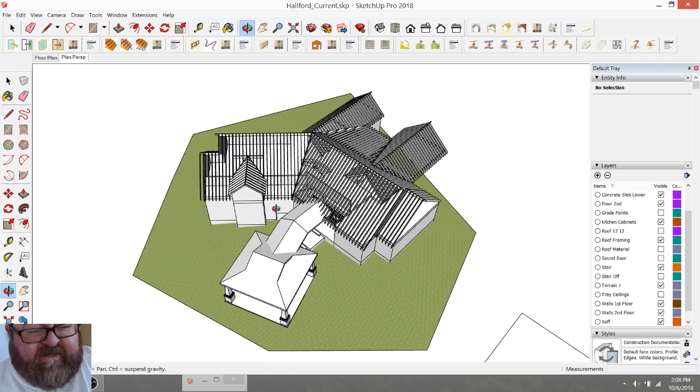Okay, so I've got an update. This roof framing has turned out to be quite the task, as it always is. Yesterday I was working on this little low slope filler piece here, and I also did this dormer roof here, the framing for it.

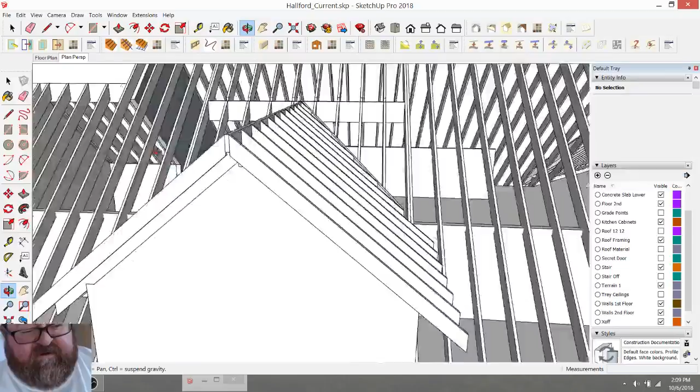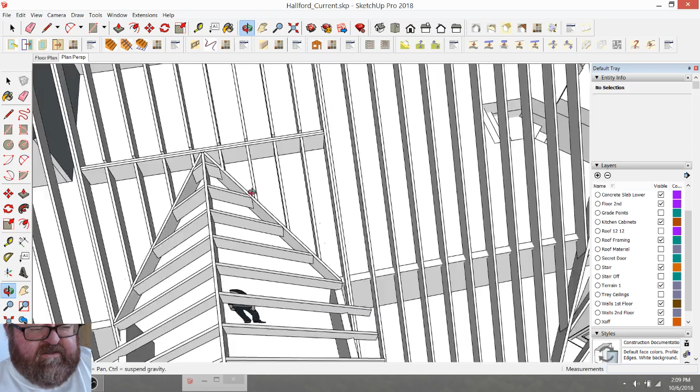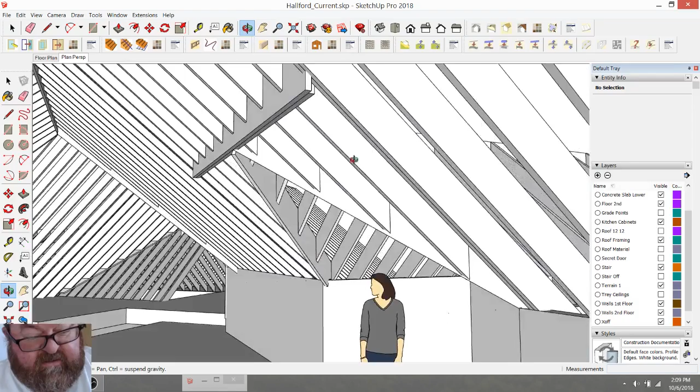You can see what you have to do is come up here and put this beam in. You double these two rafters that are on each side of the dormer roof, and then that allows you to support this whole dormer by having a beam across here. It looks a little redundant because these rafters are broken, but you have to do that because if you're going to leave it open underneath and there's no wall supporting it, oops, got some of my rafter, didn't I? Then you have to have this, and it's kind of funky.

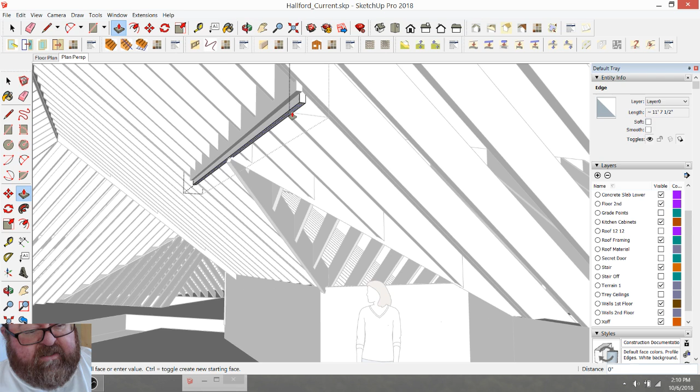You end up having to fur down your rafters to take care of these beam sizes, but honestly this beam doesn't have to be that big because I had copied an LVL that I was using for another beam, so it can be 2 by 12 instead of a 16-inch LVL that I had for something else. But anyway, that's kind of how that works.

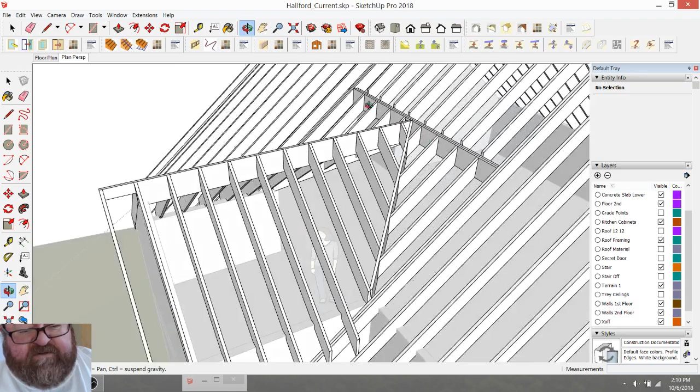And what that does is it allows you a place to stop your ridge, and where this intersects is where you put that beam, and then you can run your valley rafters up like that and cut your rafters into it. And then you just get creative with your decking when you start decking. But this video is about this Porte-cochère,

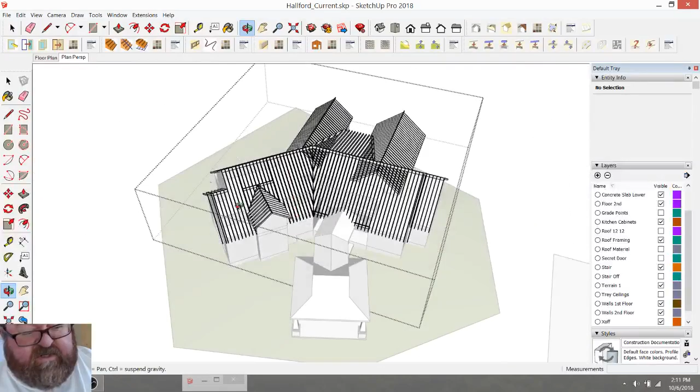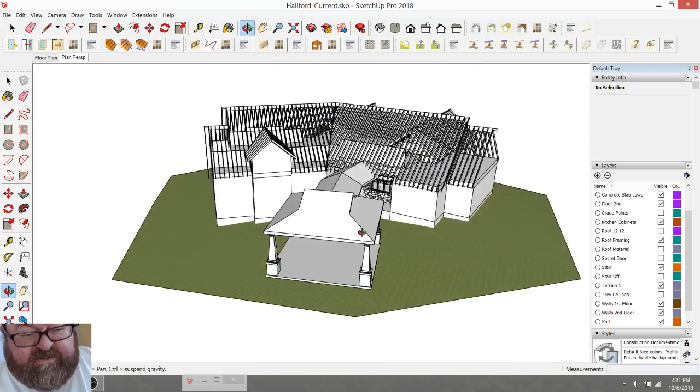or in some parts of Tennessee we call it a carport, but if you want to be fancy, you can call it a Porte-cochère. I should have shown more of this, but I was really just trying to go through with the concept of it because we don't really have much to go by, but the concept I'm using is that you want a low profile carport. You don't want a big gigantic roof on your carport. You want the main roof of the house to be the feature.

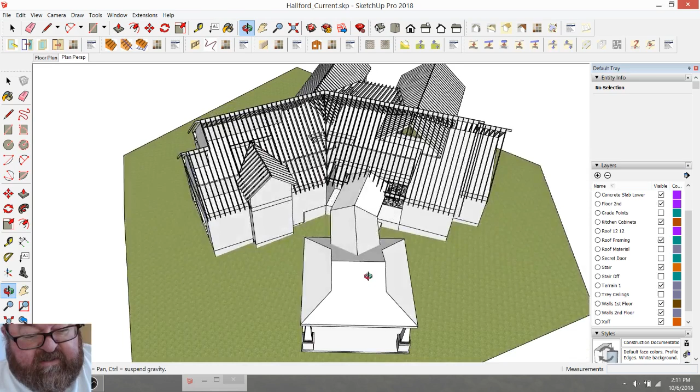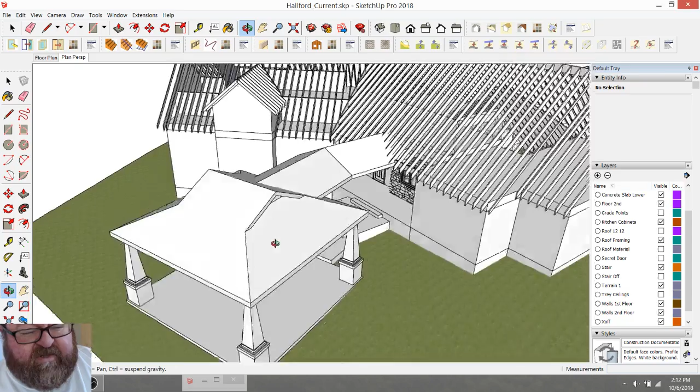So I'm going to send this to the owner and let him look at it. Well, he's looking at this video hopefully, but I'll also send him the SketchUp file. And the idea is just to have a low slope. This would be like a 6/12 or even a 4/12, which would make it even lower, because it's a 6/12 right now. I think a 6/12 looks nice. But you would just have a simple hip with these Dutch gables on it or something like that. Just something simple but nice.

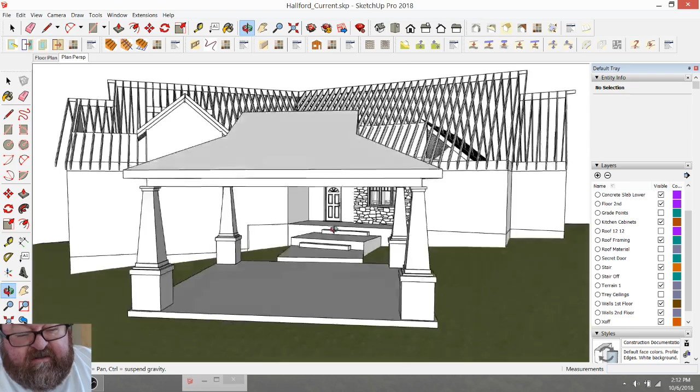And then you'd have this really low slope connector. And I really don't have this fixed. This is just a conceptual thing to show how it could step down. This is really rough here, these steps and all this. This is just a really rough idea. But the idea would be that you would have these, let me copy one of these columns out of this block.

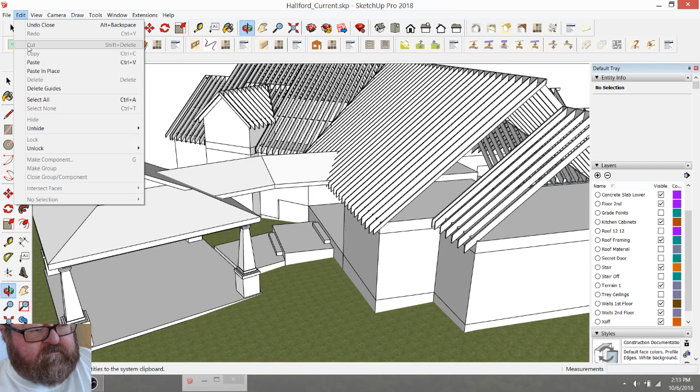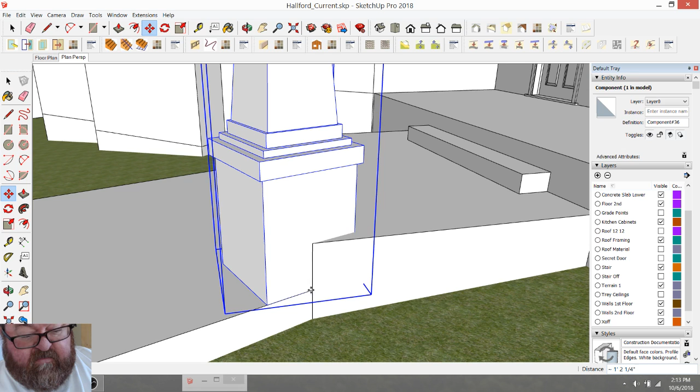And I'm going to make this unique because I think these columns will end up being their own thing, and you'd probably end up doing something like that, because you got to deal with this roof changing. So actually it looks like it's going to have to go more. Let's grab a construction line. Yeah, I guess it is going to have to go more towards this way.

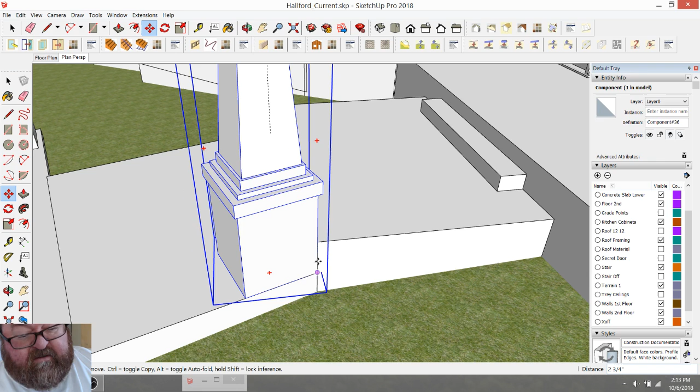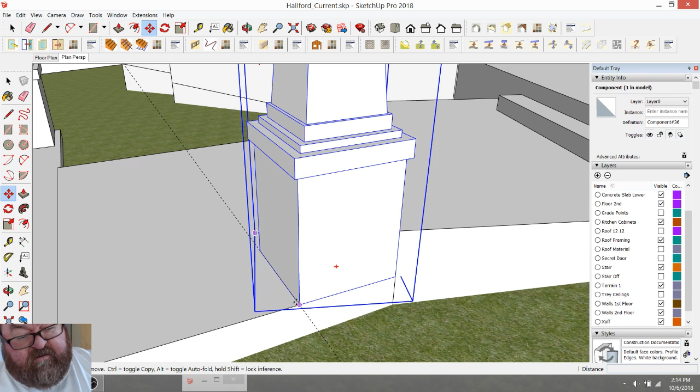So maybe this goes here, and that's good because that'll help box in these stairs like that. And the reason I made this its own is it'll go in some too. If I bring this over, oops, bring me a construction line. It would be moved in probably. And see, these columns probably need to be a little bit smaller because I can see now that's kind of huge. So let me downsize it a little bit.

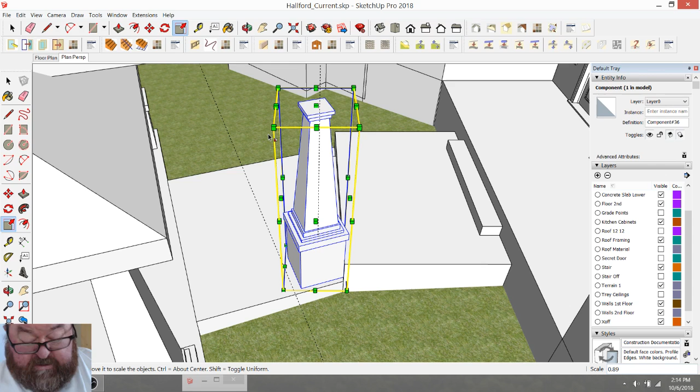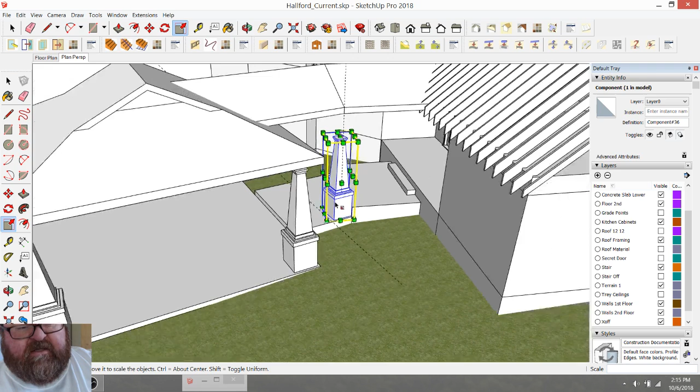Let's see if I can just take it down. Say 80%, 0.8. And again, this is just concept, so that's probably too much. Got kind of small there, didn't it? Let's go down 0.9, 10%, and then let's get rid of this. Then you'd have some kind of beam under here.

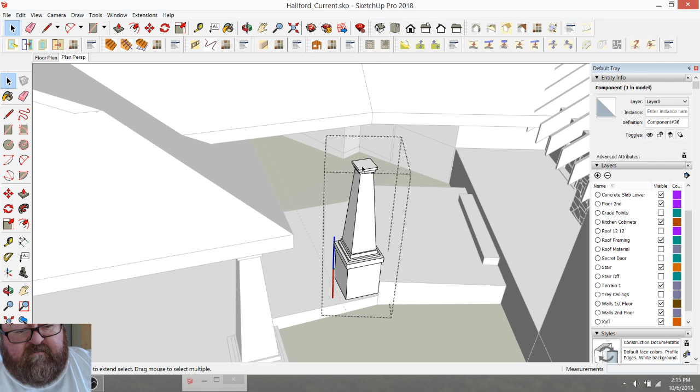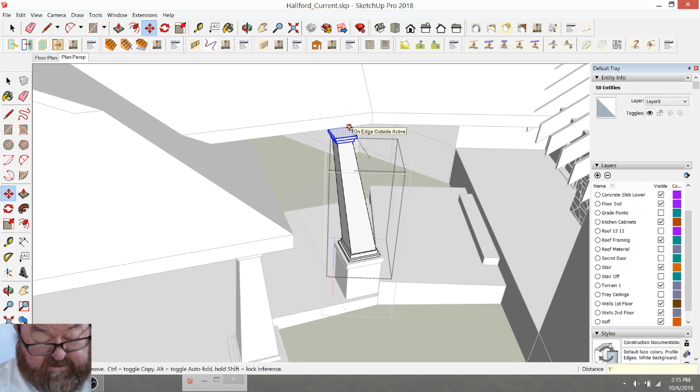Right now I'm just floating ideas out here, so I don't have a beam or anything, but this column would come up. Let's see, if that's 2'10", it would be probably 1'10". Well, shoot. Let's put ourselves a reference line on here.

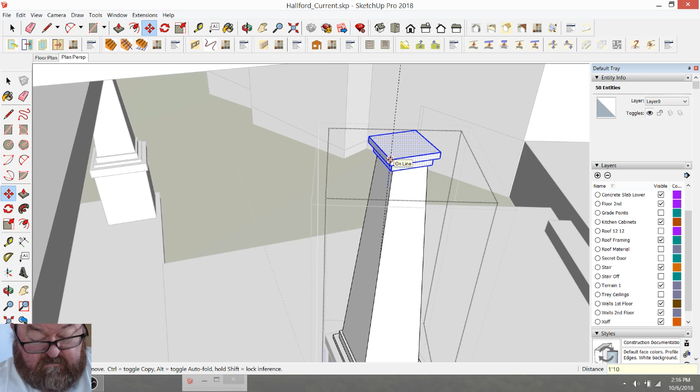There we go. And then you'd have a beam as a part of this. But I don't want to get too far because I've already spent a lot of time on this, and if he doesn't like it, it's kind of a gamble.

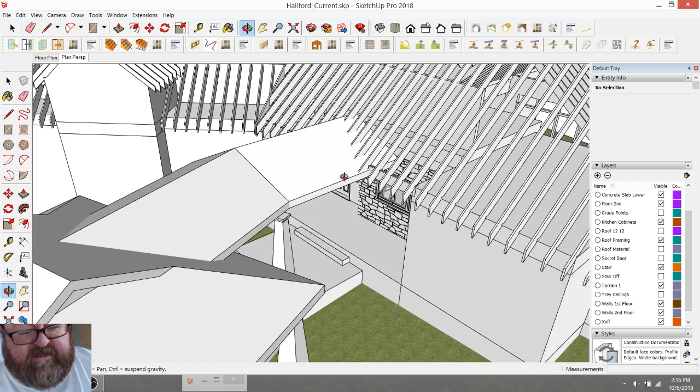So you see how I have a beam on this one. You'd have a beam also under here that went back and tied in, and the elevation is just like up in the air for this. This roof might need to be a little bit taller, like be raised up a little bit so that it doesn't interfere. Like I might even raise it up a foot. You know, 12 inches, where it seems kind of isolated and it's by itself on either roof.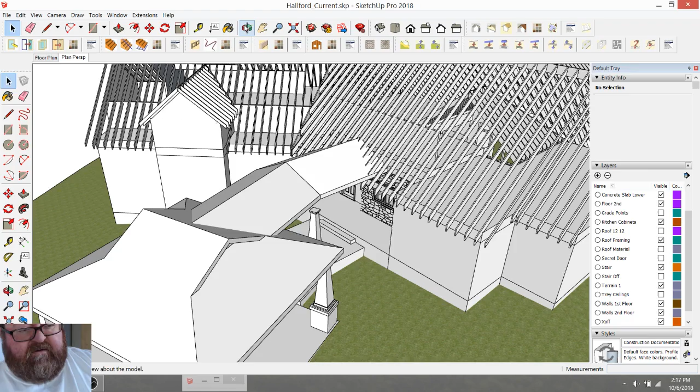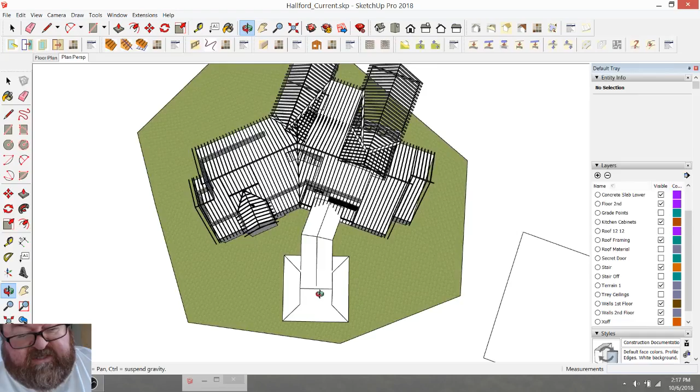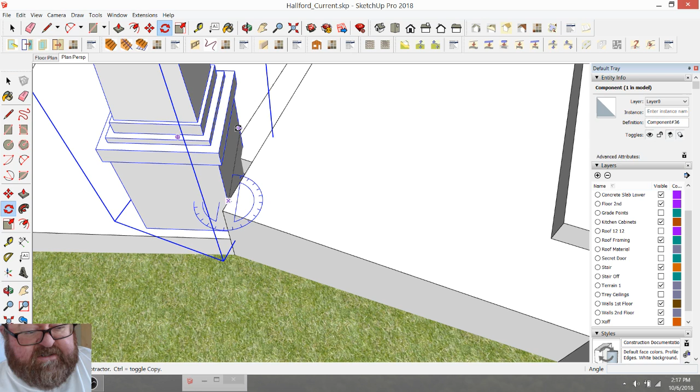And see, this carport, the porte-cochère, steps down from the house. So you want the roof to kind of be its own thing, independent of this and independent of this, but also when you're looking at it, you want it to kind of make sense. I think now what needs to happen is maybe these columns need to be maybe even rotated. And see, this is another thing that has to be decided, if I can keep from getting inside the building with my view.

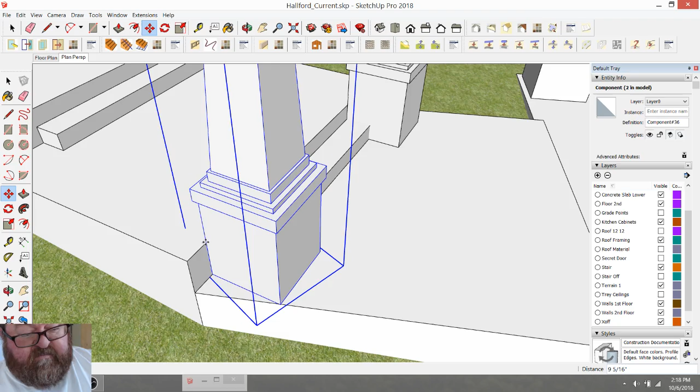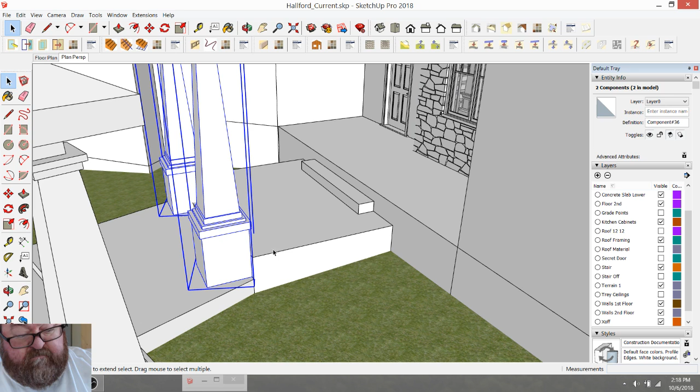Copy that one and then come over here and come back. We'll see now. This one's going to have to come back even farther. So there's some details that have to be worked out on this stuff. And then you'd have columns. You'd have matching columns up here. So you might even have these. And you might say, well, that's a lot. Well, yeah, but you got to start off with... oops, I didn't mean to copy that. I meant to hold my shift key to line it up with that.

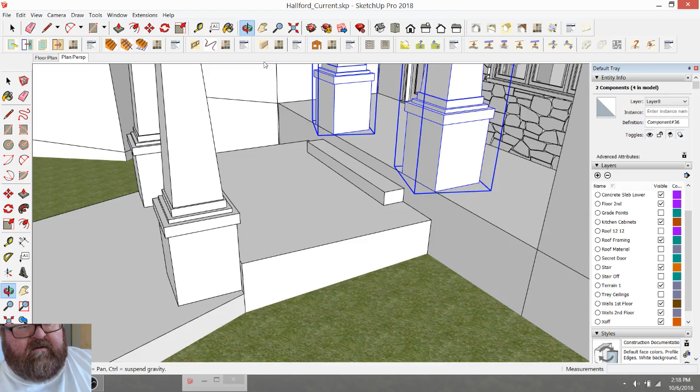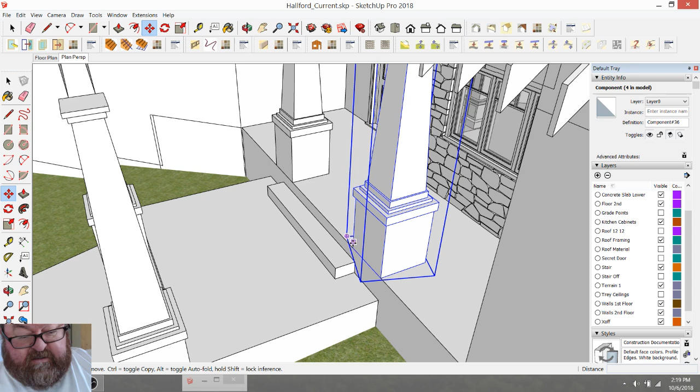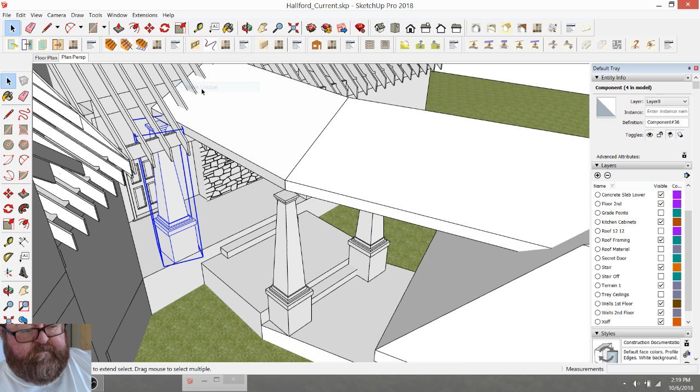But you see, that's the whole point of this schematic phase, is to say, is that an overkill of columns or what? And actually, these columns can be spread out. This edge could be lined up with that, and this other edge could be lined up like that. Yeah, that would probably be better. And then these, as a matter of fact, I'm going to make this another unique, because what I want to do here is, let's see, I just brought up an issue here.

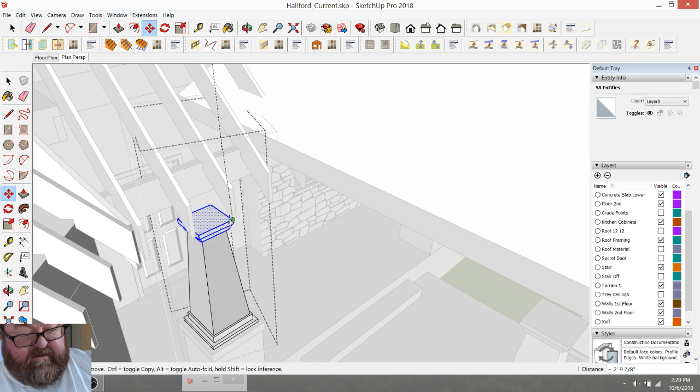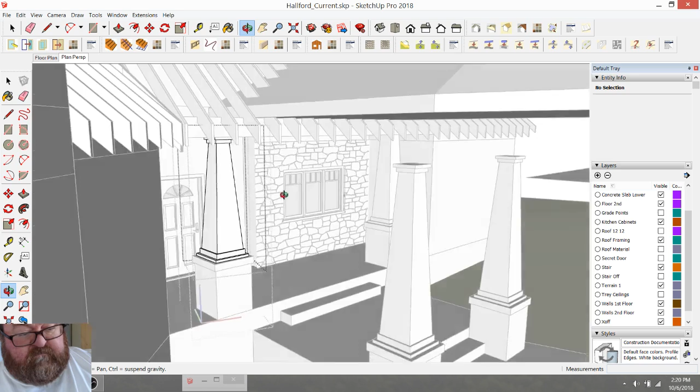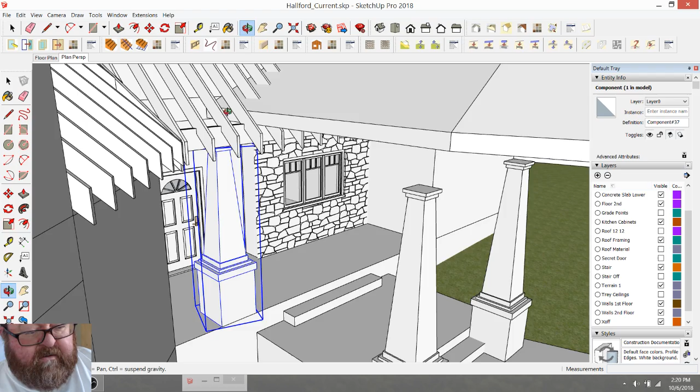These need to be kind of looking like they're supporting. I need to take that down. Let's see, hold my shift key. Now I can go back up and, is that right? Yeah, they need to be on that elevation right there. But it could be that I'm going to delete that one because I want to make it the same as this one. It could be that that is moved out on that plane, or moved out to here somewhere, and then it's built kind of half and half, which I've seen this style before.

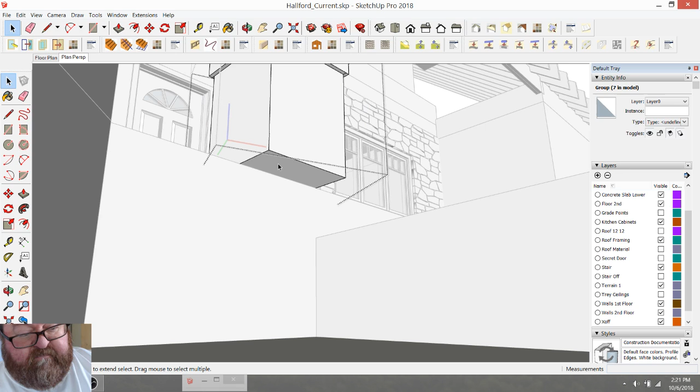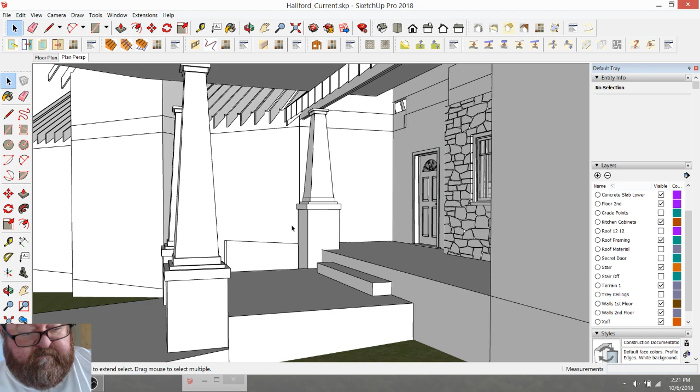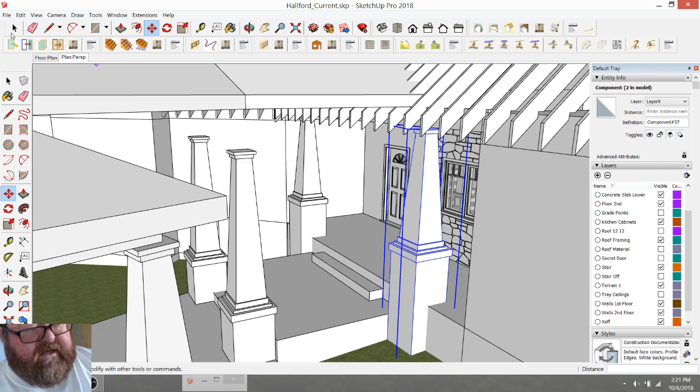Where it comes down all the way to here. And this will all be like stone. Like that. And then you'd have another one. Now, the nice thing about these being components is that when he says, no, I want it like this, I can just edit. Like this is one style of column, this is one column, and this is another one.

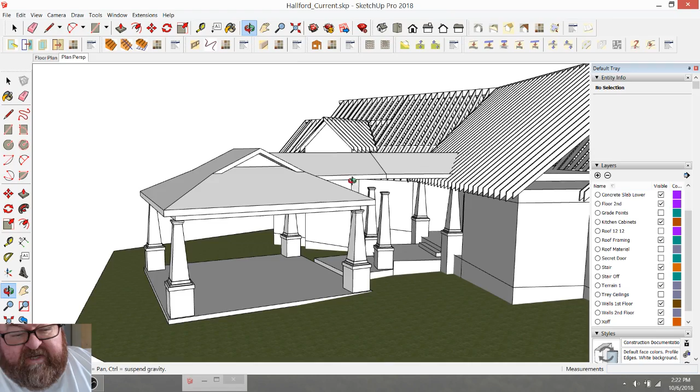So you see. And what I'll do is I'll go back in and put the beam in here, and I just want to get this past the conceptual before I spend 2 days doing a framing plan on this. This is kind of the schematic look of it, and get it past that, and then I would go back and work out the details like I do on this.

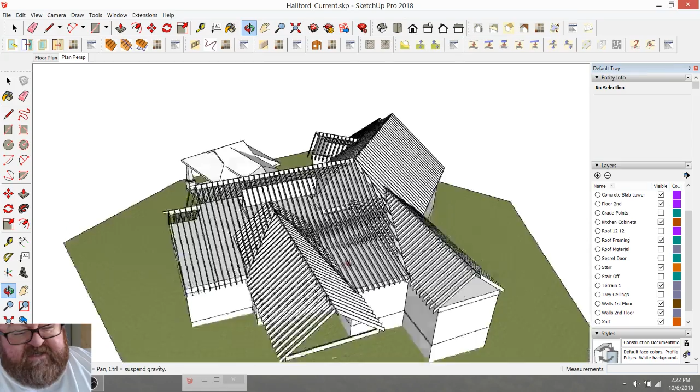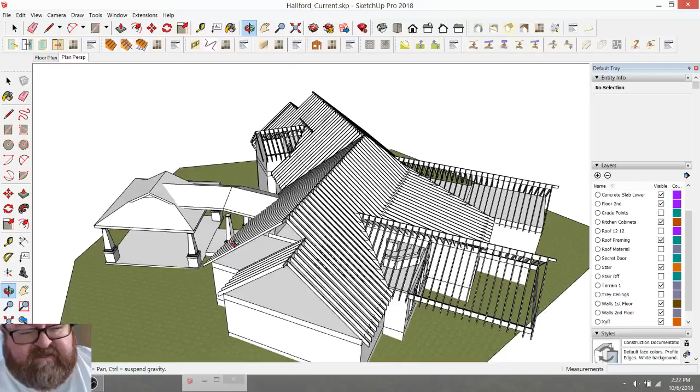But I'm missing the shoot today. I really was going to go to the IREC Vet 88 shoot, but Alex was going to be home this weekend, and I needed to work on this. I'll make that my thumbnail right there. But you got to do what you got to do, right? So that's what I'm doing.

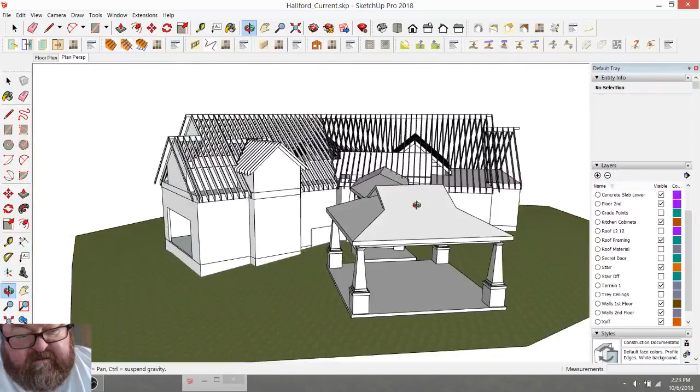Okay, well, this is just an update video, and I don't have any comments, so no questions to answer. So I'm going to send this to Johnny and see what he thinks.